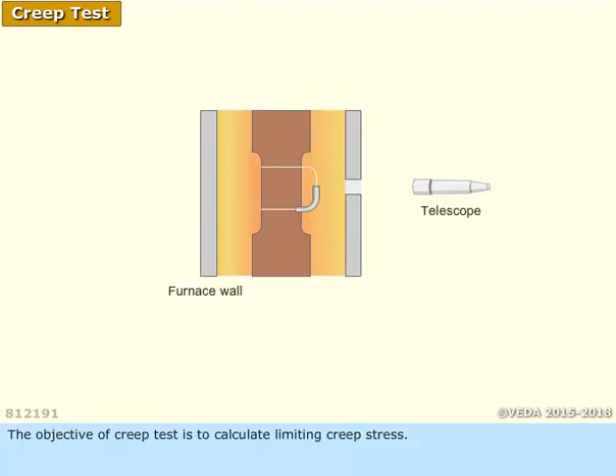The objective of the creep test is to calculate the limiting creep stress. This test measures and records stress, strain, temperature, and time. The creep test consists of applying a fixed load to a test piece and maintaining it at a uniform temperature.

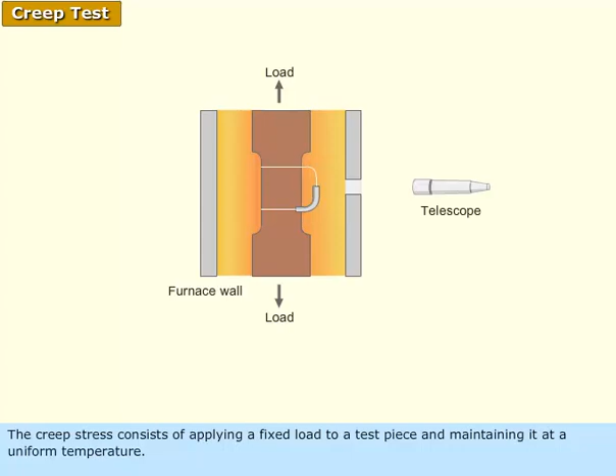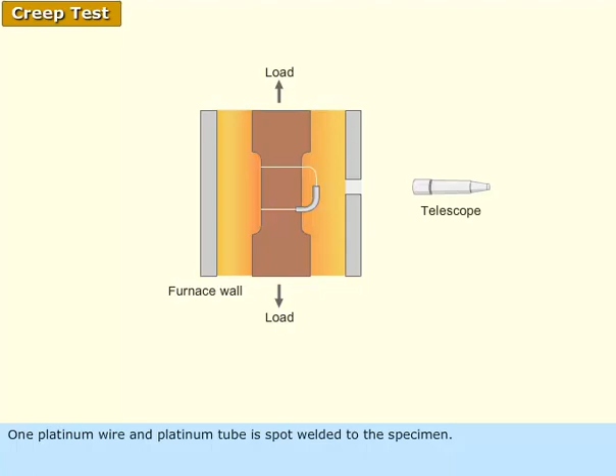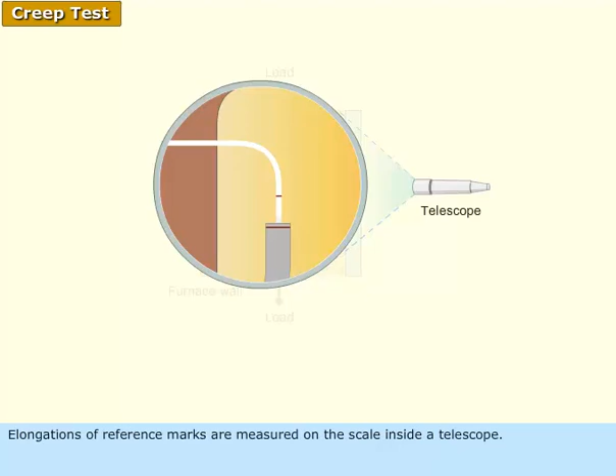One platinum wire and platinum tube is spot welded to the specimen. The wire slides inside the tube and both contain reference marks. Elongation of the reference marks is measured on the scale inside a telescope, and recorded at the desired time interval for the entire duration of the test.

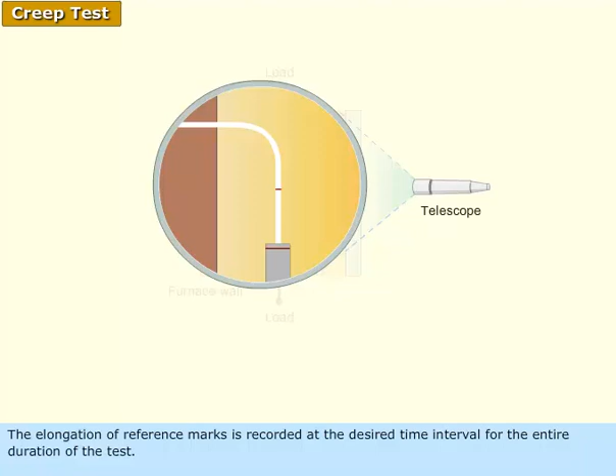The values are plotted in a graph to obtain the creep curve. The limiting creep stress of the material is calculated from the curve.

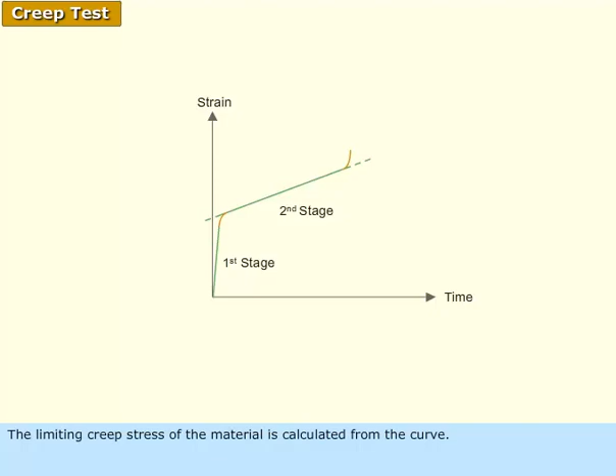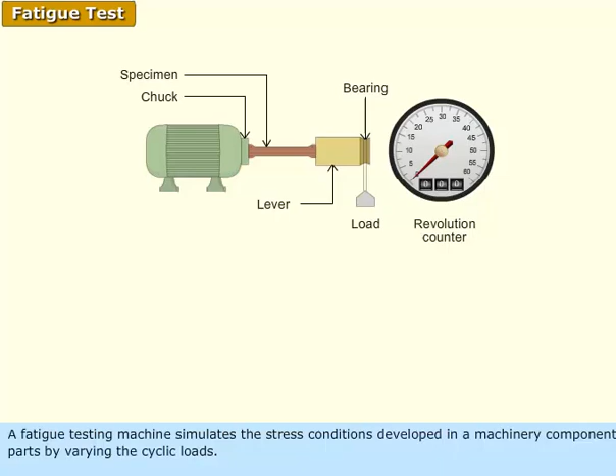A fatigue testing machine simulates the stress conditions developed in machinery component parts by varying the cyclic loads. The magnitude of stress is changed in the machine.

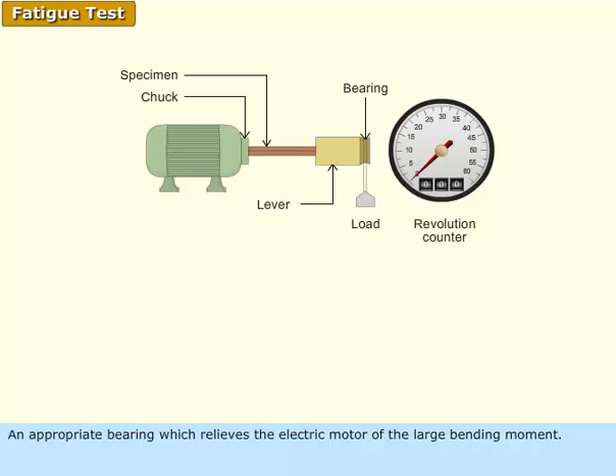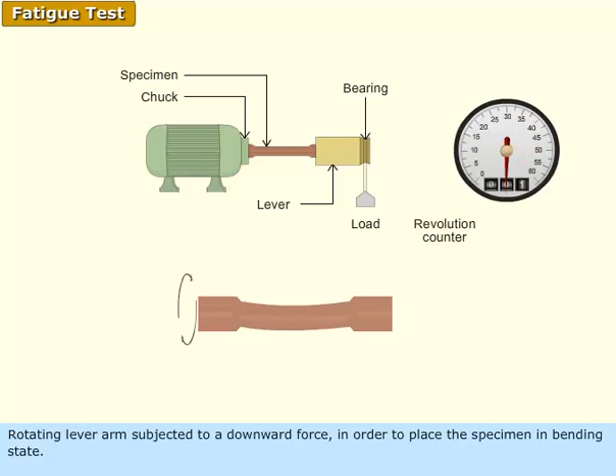The setup consists of an electric motor capable of running at 10,000 RPM, an appropriate bearing which relieves the electric motor of the large bending moment, a chuck to hold the specimen, and a rotating lever arm subjected to a downward force in order to place the specimen in a bending state. The revolution counter measures the number of revolutions the specimen has undergone.

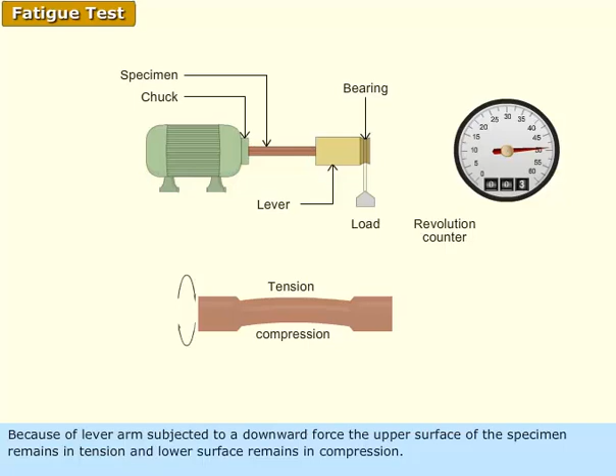Because the lever arm is subjected to a downward force, the upper surface of the specimen remains in tension and the lower surface remains in compression. While the specimen is rotated at higher speeds, at any given position, the specimen is subjected to alternate compressive and tensile stresses.

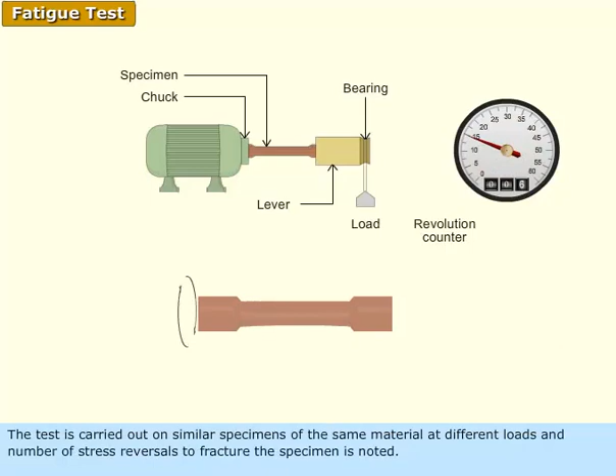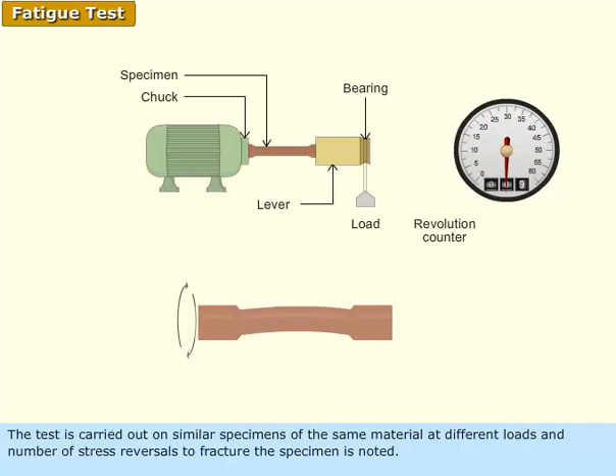The test is carried out on similar specimens of the same material at different loads, and the number of stress reversals to fracture the specimen is noted. The results are plotted on a graph from which the fatigue limit is calculated. A logarithmic scale is adopted to condense the graph.

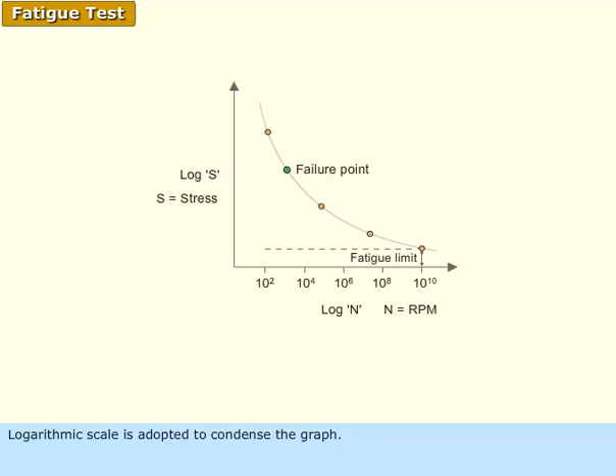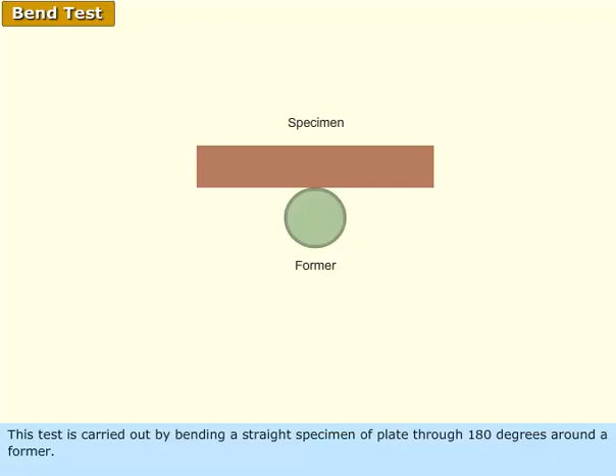This test is carried out by bending a straight specimen of plate through 180 degrees around a former. For the test to be satisfactory, no cracks should occur at the outer surface of the plate.

The significance of this test is that it is carried out on boiler plate materials, because a boiler is a fired pressure vessel.